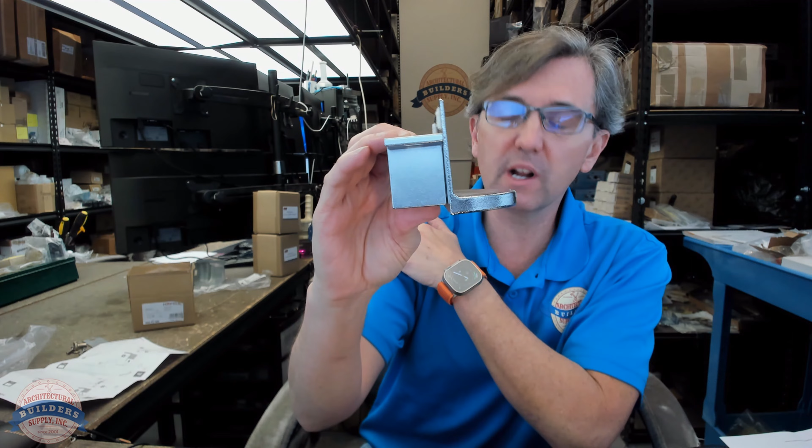I'm not sure about you, or at least I can speak for one potential client of ours, it's not necessarily straightforward how this is used, at least it's not to me. So let's discuss exactly what this is. They call this a foot pedal, and this is going to be something you use to help get a waste rolling cabinet open. I guess presumably there's not a handle or a knob on the waste bin that you can use, or perhaps you've got your hands full, whatever the case might be.

Let's take some basic dimensional properties and we'll dive into more of how this is used. Overall width is about 4 11/16. Its overall height looks like it's about 2 3/4. Its overall depth is about 3 5/16. And its weight, let's talk about how heavy it is - the weight of the unit is 1.53 pounds, so it's heavier than I suppose you might initially think.

So how does this operate? Let's take a closer look at its functional operation.

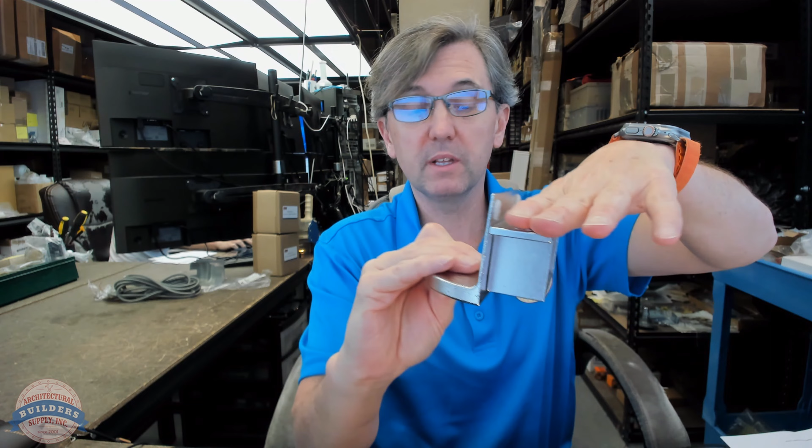So the way that I view this is, here's your right side view, here's your elevation view, and here's your plan view. On the back side, there's a spring back here. That tells me something is meant to pivot. When you touch it, you can get something to pivot. You can pull on that and it will come apart, but I think what's really happening here is these two oblong holes are meant, in my opinion, for something to be attached there. So this point will be fixed. You can pull that forward, I suppose, but I think what's meant to happen by virtue of these triangular shaped components is that that's meant to tip out.

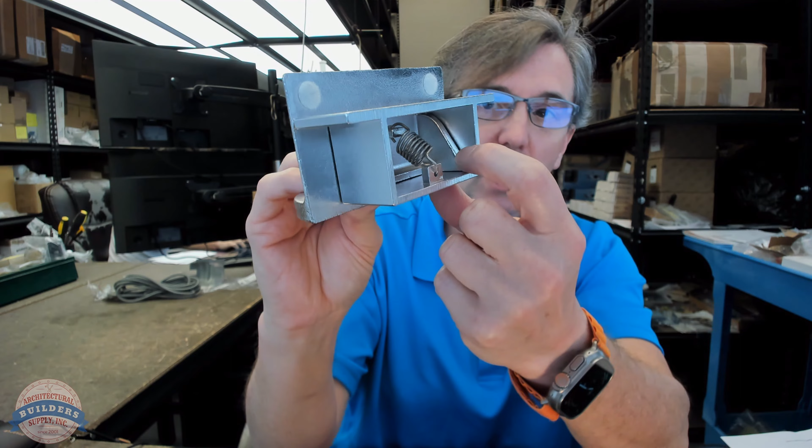And indeed it does. Taking that reasonable conclusion and then looking at the instructions, which we'll do next, this is going to be mounted behind. Another tip-off there is how relatively thin this material is. This will be mounted underneath the cabinet and behind the cabinet face of your drawer.

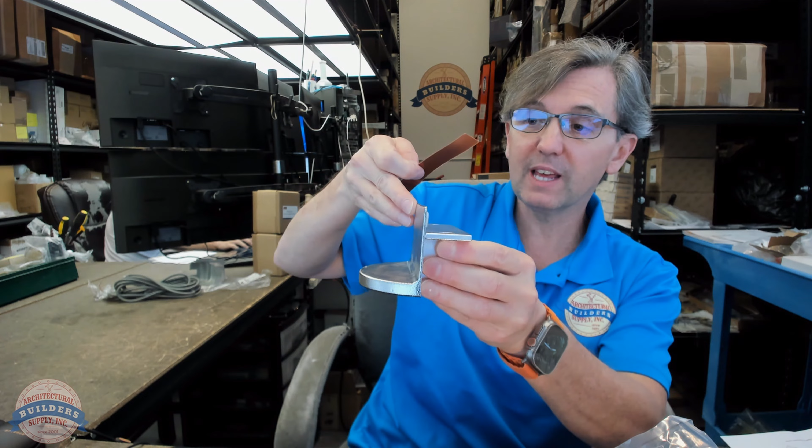So all this functionality really does is, when the cabinet is closed up tight to this, I would think you might need to mortise the face of this to draw it back flush with your cabinetry. But when you push on that with your foot, that's going to force the face of the cabinet out and away from the jamb, and that's a reasonable conclusion because there's a wear strip, a self-adhesive wear strip that's meant to go on the back side of your cabinet, so that when you push that forward, this leading edge is going to hit this wear strip on the back of your cabinet.

So the only other dimension we could take is how far out does that really go. I have this at least 70 degrees - that's going to push out about 2 1/4 inch. So when I deflect that out that far, it's going to be about 2 1/4 inch. By that time, really the only effective reach is going to be how far down your cabinet hangs. But 1.5 inch, 2 inch - I would think this is meant to give you something in that range in terms of getting the cabinet open.

I suppose at that point you can put your hand down and pull it through. I guess this could be for - Hafele being a European company, you're going to see hardware for kitchen and other storage applications that may be slightly atypical in American applications, so to some of us it might be foreign. Why wouldn't there be a pull or a knob? Well, I could imagine there is no hardware on bottom cabinets, but you still need to get it open - this foot pedal would be a great way to go about doing that. And they also mention it's not only for a rolling refuse container, but could be used for a bottom drawer as well.

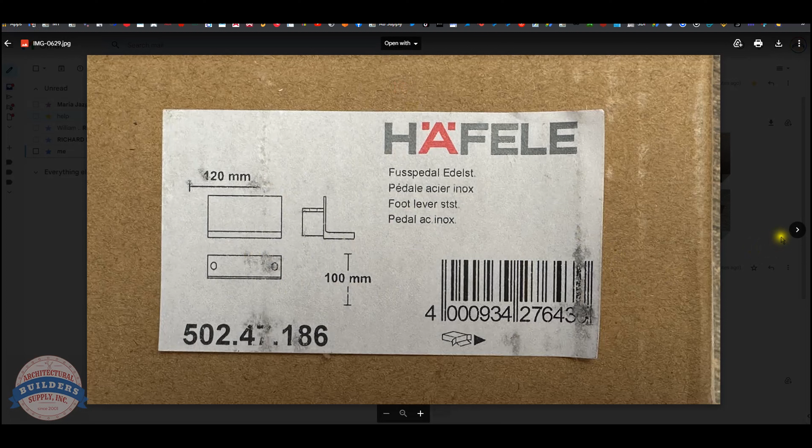Here's the item that we are reviewing. Let's take a look at some images that we have uploaded here as well. Here is what the box looks like, the label. It's not really obvious what it's doing when you look at that. Here are the contents.

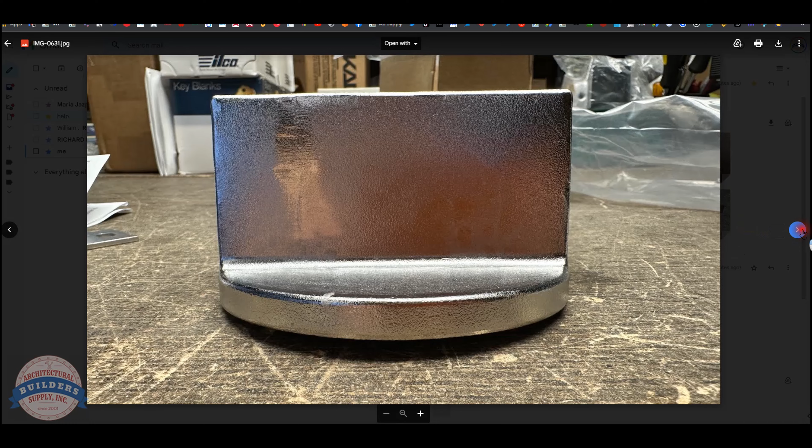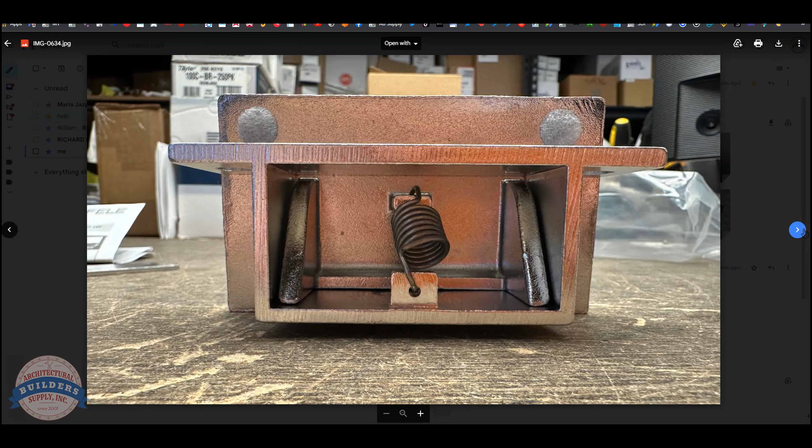Front view, or elevation view is what it would be called. Plan view. I would call that a left side view, actually. No, forgive me, that's a right side view. The back side, showing that spring. It's not hinged anywhere, but when this is fixed and you put your foot down on the front, it can only tip out the way that I demonstrated earlier.

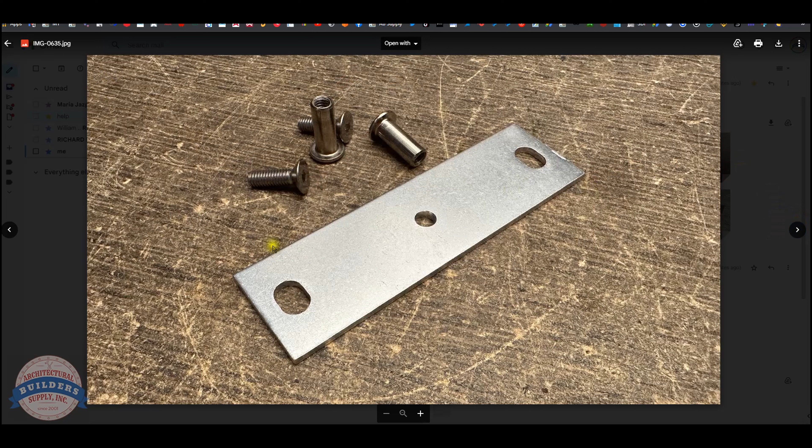The shim template mounting bracket, binding posts, your wear strip there. Okay, foot pedal for waste bins, suitable for waste bins behind front panels. Can also be used for the bottom drawer, can easily be retrofitted.

Dimensions, material, stainless steel. This is not stainless steel. This is some sort of a cast material. It has a silver type finish, but it's probably zinc would be my guess as to what it is. But stainless it is not. Sold as each. When you buy one, we'll ship you one.

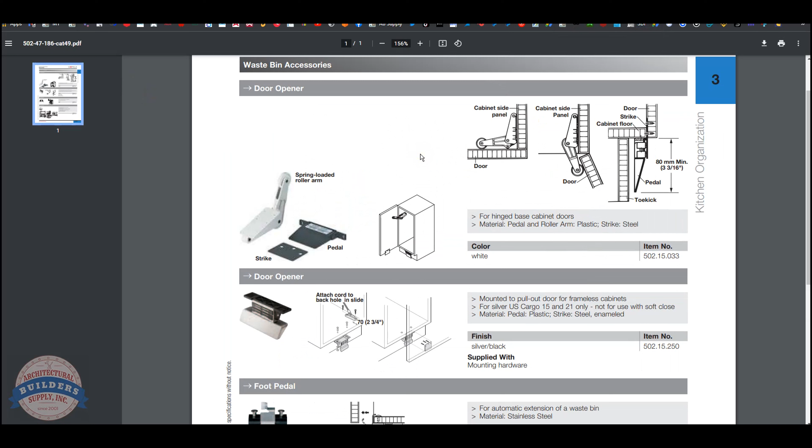Let's click on the link here to the manufacturer's page, and this will show you this item and a few sister products, actually.

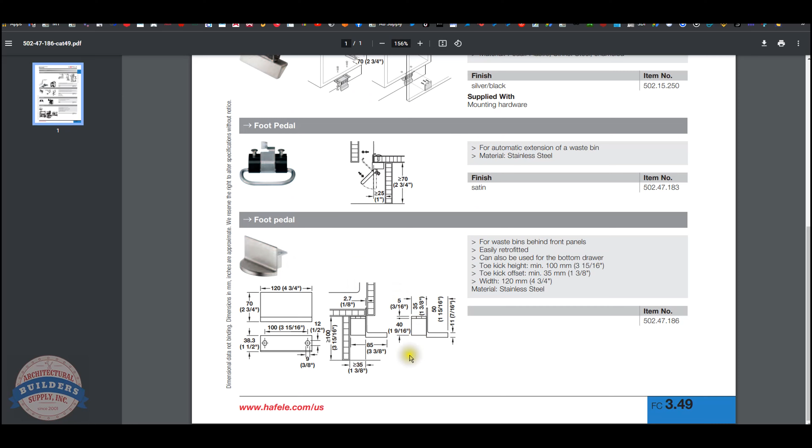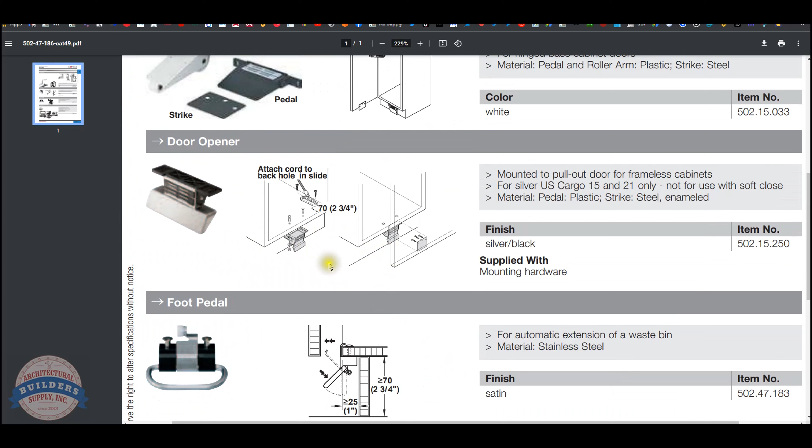We'll look at this in the installation instructions. The other items that are here are clearly similar in nature. This might be a latching system that's here.

Okay, let's take a look at the installation instructions, or mounting instruction. So, in true European fashion, no words, lots of pictures. The parts have been identified. We don't know what they're called. Doesn't really matter.

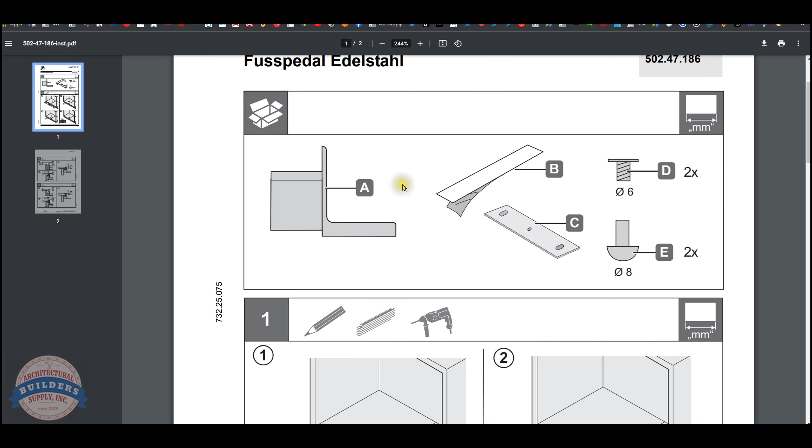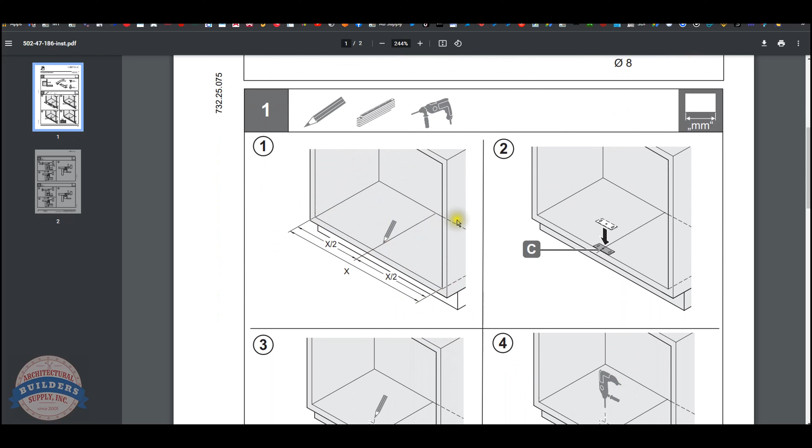This is a formula telling you to install it on the center line of the cabinet. They want you to use that to mark the 2 holes and then to drill the 2 mounting holes. I'm going to go with that being millimeter. So just less than 1/3 of an inch, maybe 5/16, something in that range.

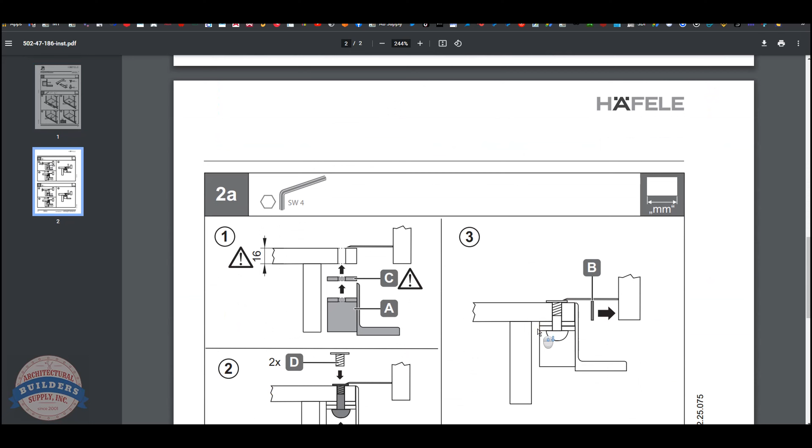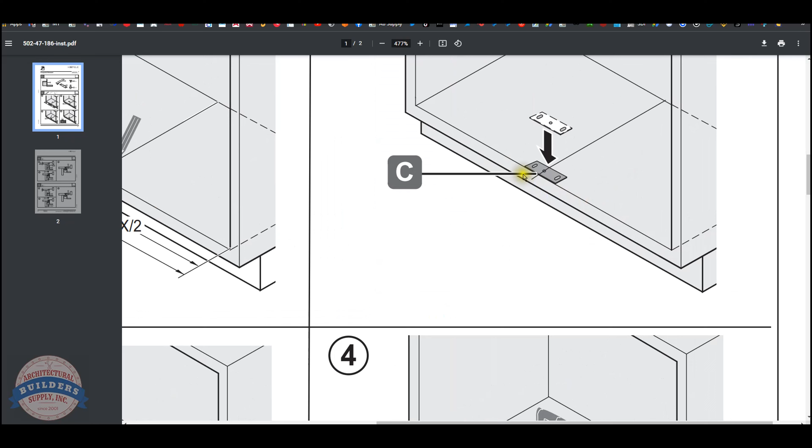So here's the cross section. So this is all obvious. I guess they're inferring that you're going to space this to the front, just flush it to the front of the cabinet right here. Those holes appear to be equidistant from the front or the back of the unit, of the plate.

That's part C. Part A is the business end. Part B is the wear strip. So there's self-adhesive tape that's there, that gets applied to the back. This line here must be a reference to the drawer slide, the refuse container, whatever it might be. This has to be the greater, it must just be showing that this moves in that direction.

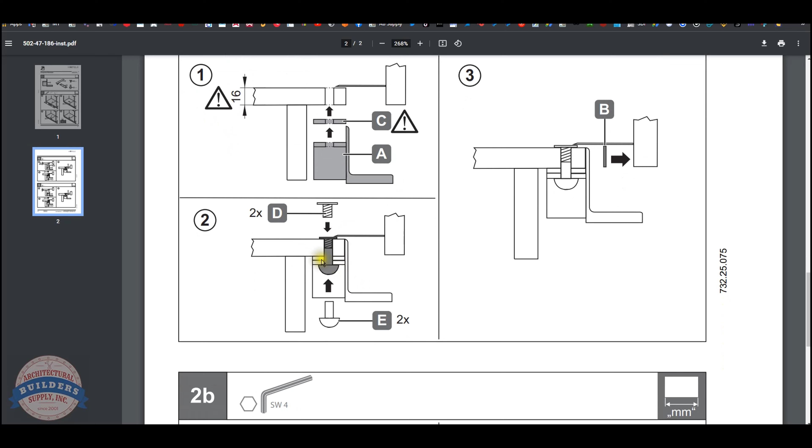You drill the hole, you can see that the plate is here, but it's not here when they go through the steps of actually installing it. So it may be just a shim, it may be optional. I'm not sure what the definition of this is, other than, I'm not sure. So use it or don't according to your application.

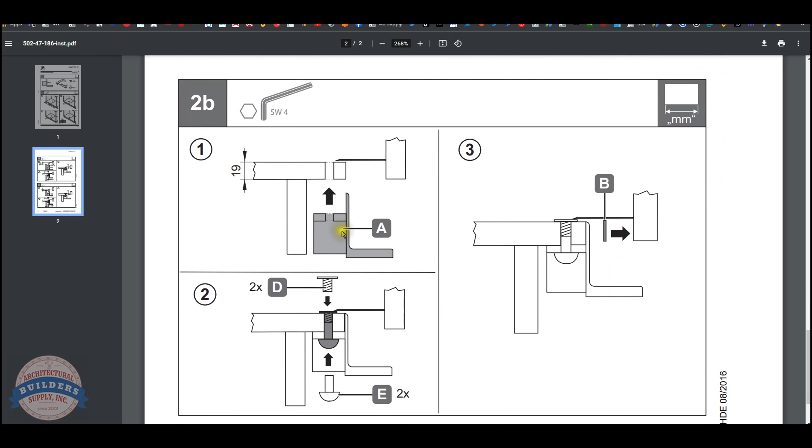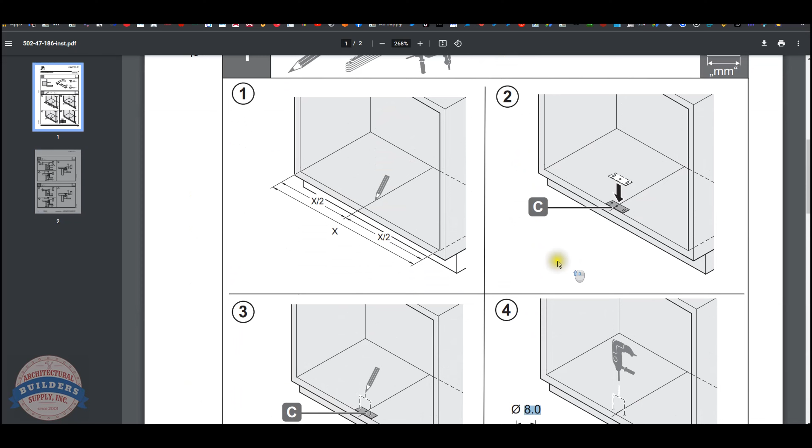If anything, I would be tempted to mount it on the top as a reinforcing plate is what I would end up doing. I would mount it here, but rather than these binding posts, because that'll likely, it could be solid lumber, and if it is, it could be soft enough. Enough depressing this pedal may cause stress on that. So I would be tempted to mount it up at the top and leave it there. Because you're likely never going to see it.

So that's your installation. What would be nice would be one more picture simply showing this tipped out at 45 degrees, an arrow, that kind of thing. But discovering the material, having it in your hand, makes it really obvious what it does and how it works.

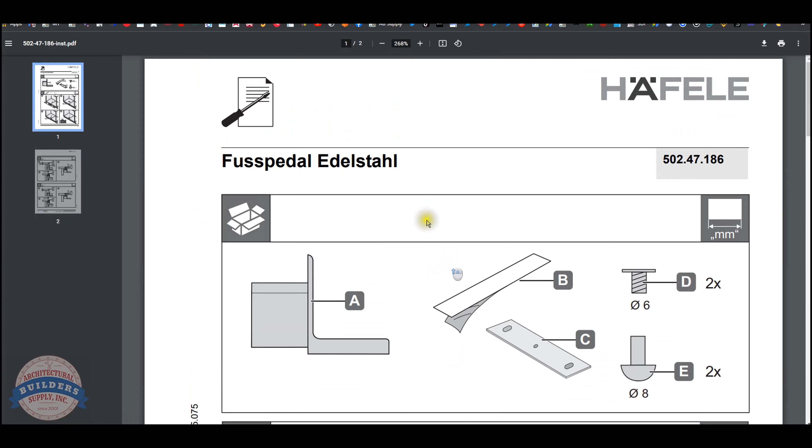The one complaint with Hafele is that they usually produce nearly an adequate amount of documentation for a lot of people. Catalog cut, installation instructions, screen grabs of certain information, but sometimes it's still not obvious how it's installed, and this is one of those instances. Client couldn't sort it out. I really wasn't comfortable with the guesswork. I asked them for a sample, and here it is, and this video ensued.

Let's wrap up this video on camera.